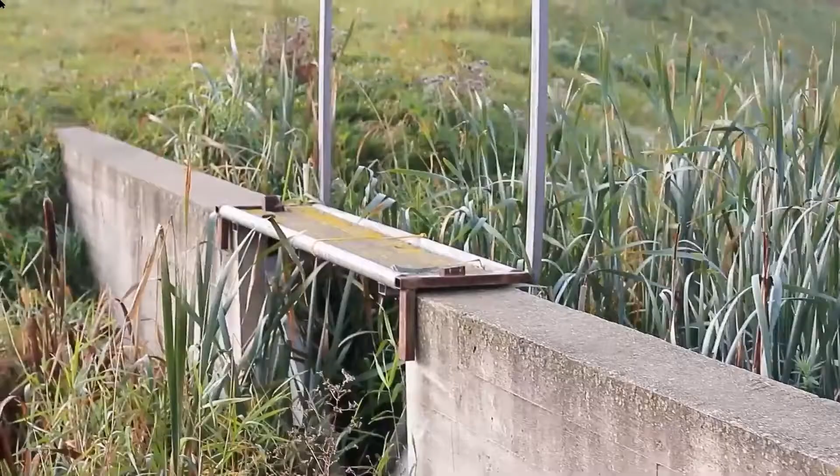Besides this mini diver, we are standing on the dam, which has a Thomson weir underneath, so we can again calculate the water flow. In this monitoring station, we have different equipment for automatic water sampling, for measuring conductivity and water temperature.

And yes, in terms of efficiency, I can say that the treatment process is going well through the years, and we are satisfied with that.

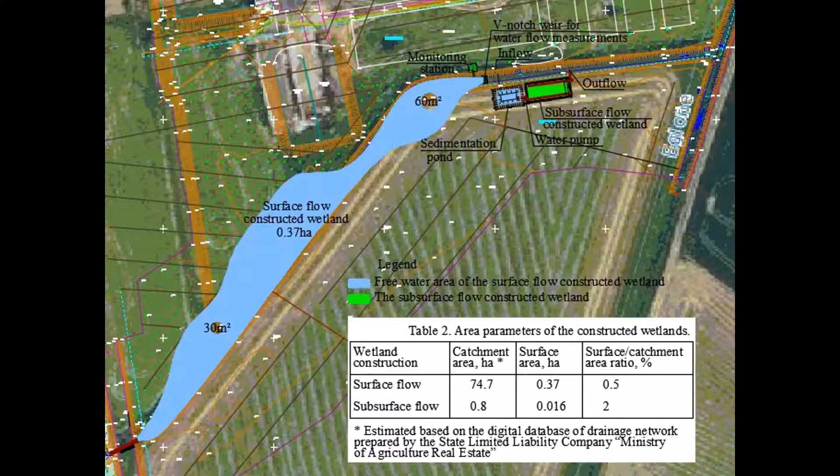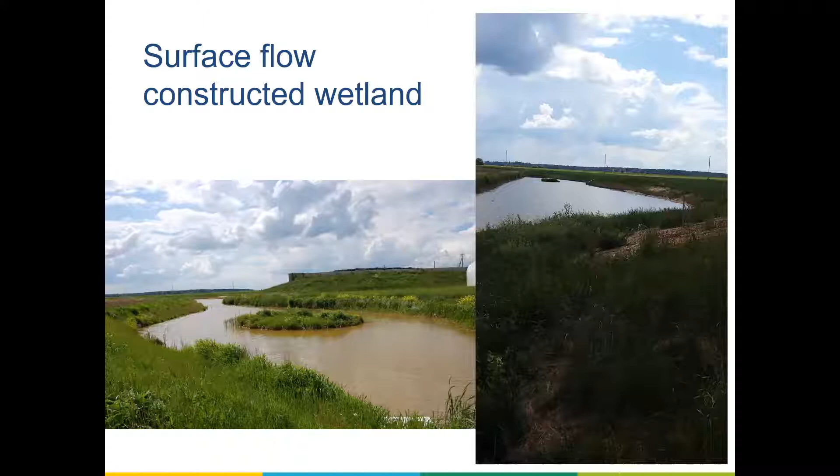So here's the view again for this surface flow constructed wetland, and basically it has worked already for years, and through all those years we have done a monitoring process, and the same with this subsurface flow constructed wetland.

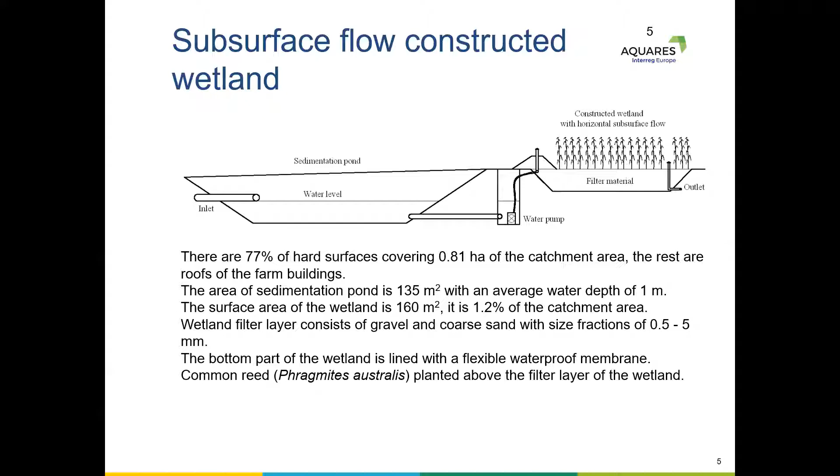Here's just a cross section to show you more detail about what is in the subsurface flow constructed wetland, which is made for surface runoff from the farmyard. Basically, it's rainwater from the hard surfaces. Once again, all the numbers you can find out later or just ask me.

So here it's filled with gravel, planted with common reeds, Phragmites australis, which is a very good growing plant. That's why it was chosen in this case.

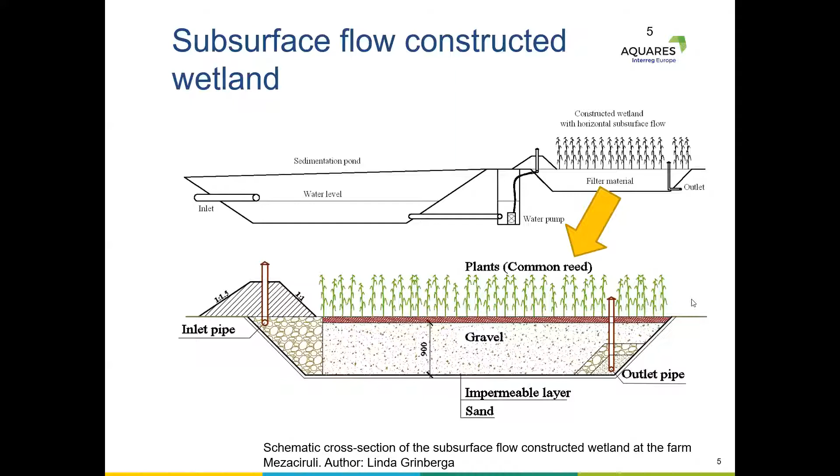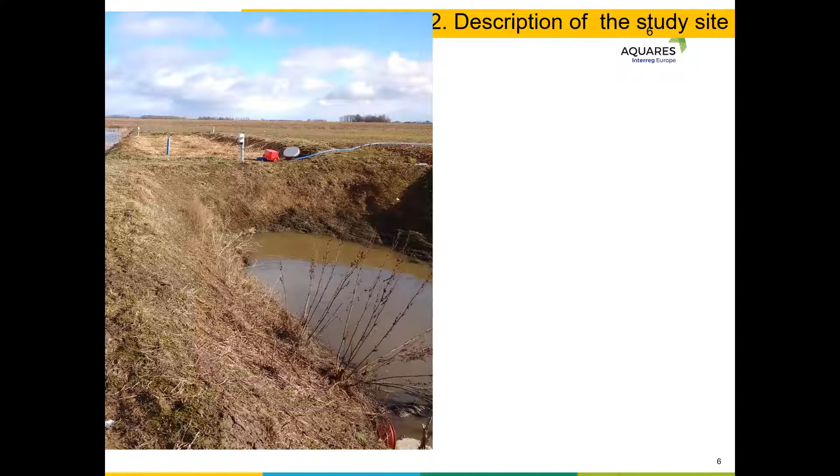Yes, so basically this is already with some plants, beginning of summer, as the seasonal impact in Latvia is very visible. So if you were here this month, you would see a completely different view of this object.

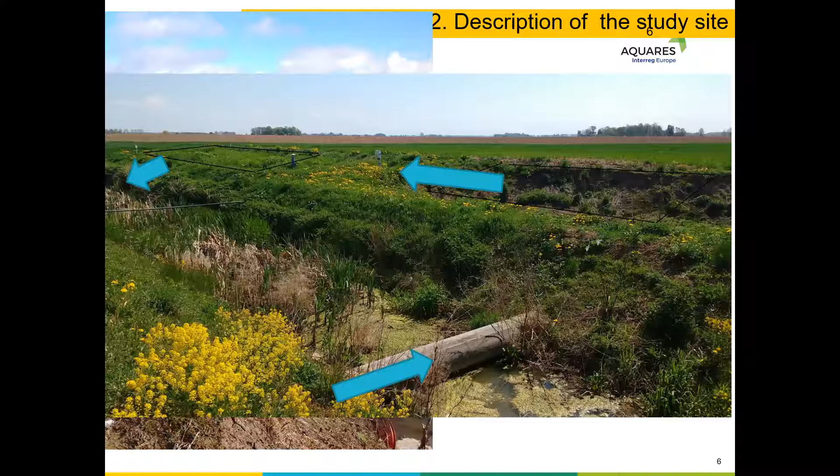So water goes from the farmyard and hard pavements to the sedimentation pond, then through the pipe to the constructed wetland, and then is released back into the open ditch, and with self flow goes to the natural water course.

The methods, basically, we are taking samples for suspended solids, nitrate nitrogen, ammonium nitrogen, total nitrogen, orthophosphate phosphorus, and total phosphorus. We do it once or twice per month, depending on the water flow. If there's no flow, we are not taking the sample. If there is a flow, then we are taking the sample.

And yes, the samples are taken at the beginning of the wetland and at the end of the wetland. What is very interesting for this subsurface flow constructed wetland is the water contains a lot of organics due to all the cattle and the equipment moving around the surfaces. For this year, 2020, we are taking samples not only for those 6 parameters, but we are also analyzing BOD and COD, and the results are so interesting.

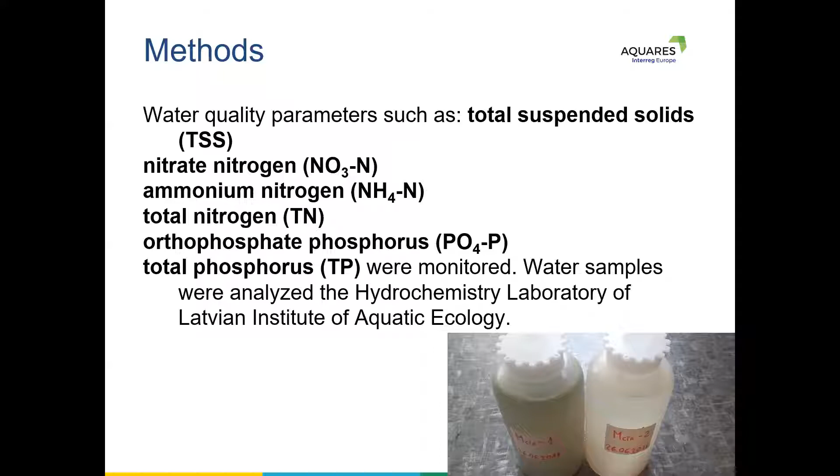I'm very happy for that. I will show you later.

So let's move on. Just a view to understand the situation in Latvia, because it really depends on runoff, precipitation, and whether you have enough water resources, as this project is more about the water resources. In Latvia, basically we don't have a problem with the water amount. There could be a question about water quality, but about the water amount, I wouldn't say that we don't have enough. We have.

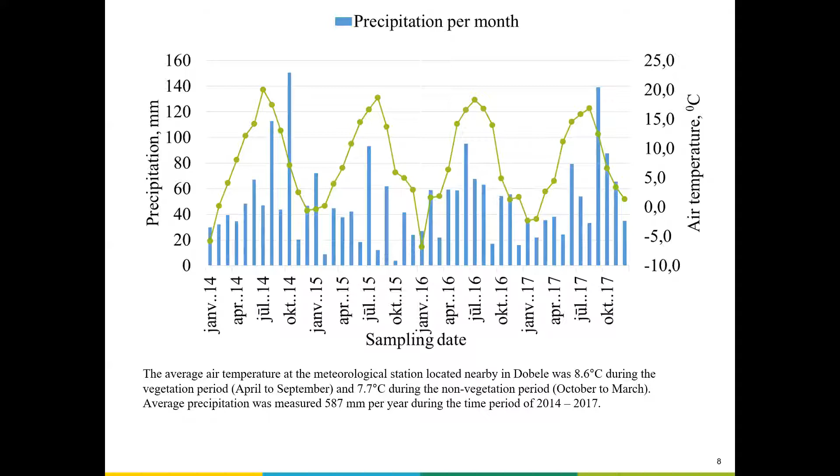So here you can see some data about the precipitation and about air temperature. Some tendencies, seasonality is very good visible. Because of those winters, because of the climate conditions in this area of Latvia, I suggested we use common reeds as vegetation for the constructed wetlands in both cases, because they grow well without any special treatment. They just grow, you just have to cut it regularly.

Yes, and in the surface flow constructed wetland, basically we didn't plant any reeds. In the first year they just spread naturally, and now you saw the video that there is enough vegetation that is serving, basically, for the bacteria. So bacterial activity is the main thing that is treating the water in constructed wetlands.

So the numbers. I would say that as this is a real object, this is not like a lab where you can easily set up the water quality of what comes in. In this case, it's even more interesting because real processes are going on in the farm, excavators are driving, equipment is moving and doing their daily things, and I'm just in the middle of that with my research object, taking samples and then trying to explain why I have this or that result in this or that month.

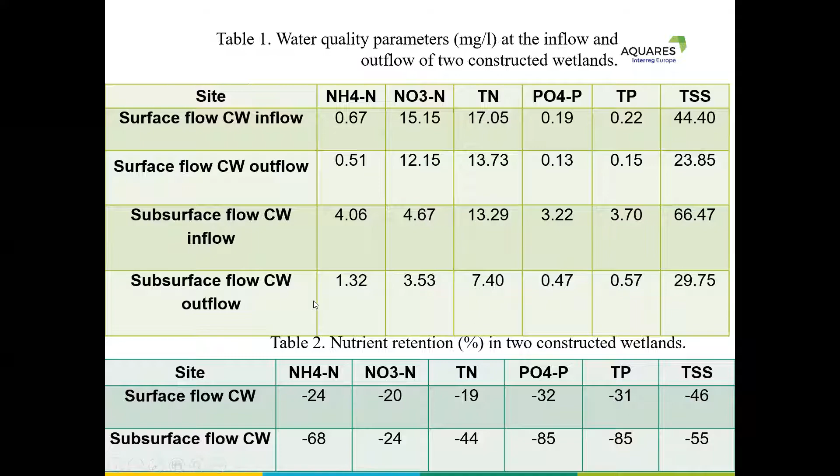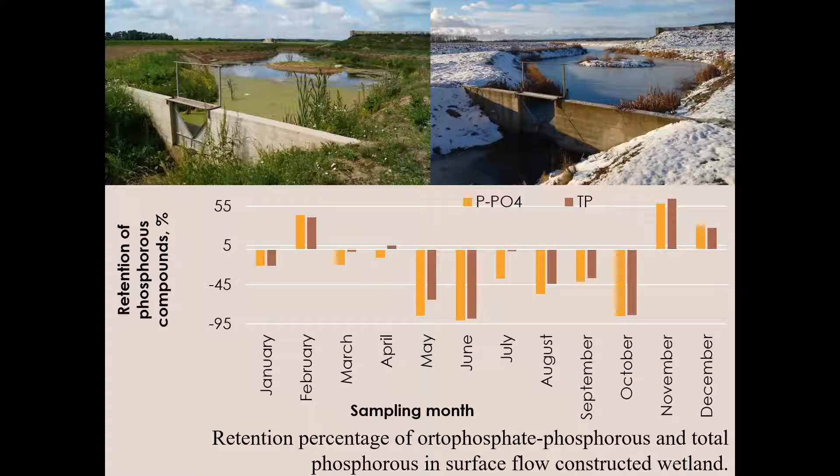The best retention, of course, is during the vegetation period, but this is more due to the water flow and the retention time of the water in the constructed wetland. If you look at treatment in this wetland, in February there is snow melting water and maybe some rain events, and the same in November when it's autumn, there are some rain events which increase the water flow. So the retention time is shorter. Maybe that would be the main issue with the retention efficiency for the constructed wetland.

It's for the phosphorus compounds, and with nitrogen compounds it's more complicated, of course, because bacterial activity is more involved in different transformation processes. Besides that, the surface flow constructed wetland receives not only the drainage water from the catchment basin, but periodically there are some events when surface flow is coming in the middle of the wetland, and that's why those results are very interesting during different seasons, due to activities in the fields.

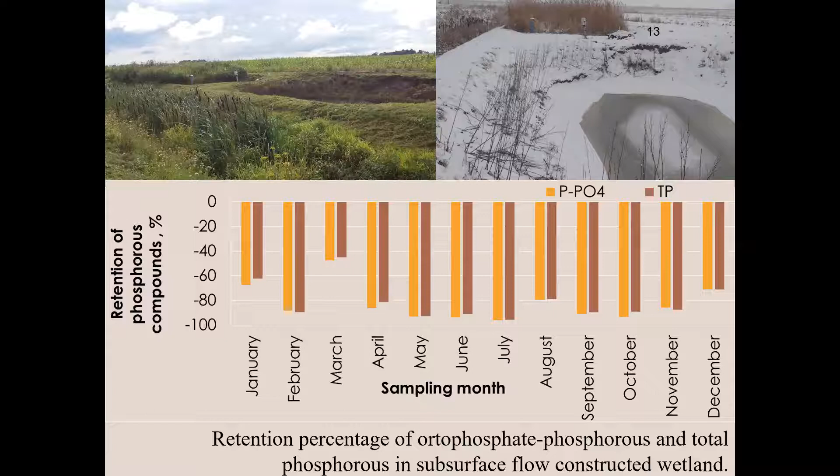So, here is proof that the winter or lower temperatures don't affect the retention efficiency for the constructed wetland. It can easily be used for different kinds of wastewater treatment in these hydrological conditions. The only slightly lower efficiency is during March, which is connected with snow melting waters, meaning more water flow goes through the constructed wetland, and that's why efficiency is a little lower during that month.

Okay, let's skip to the conclusions. I will focus more on what is connected with this particular project and with sustainable water using, because this project was initially made as a treatment system.

But when we built it and started to exploit it and do the monitoring, the owner showed us how this wetland can be used even more, not only for wastewater treatment or water quality improvement. Maybe it wasn't so clear in the video because of the echo sound, but you are able to watch it later once again.

The first thing is that near this wetland are greenhouses, and on this farm, this natural water course, this small stream, during summertime during the vegetation period, the water amount in the river is very low. There are not enough surface water resources to use for any irrigation.

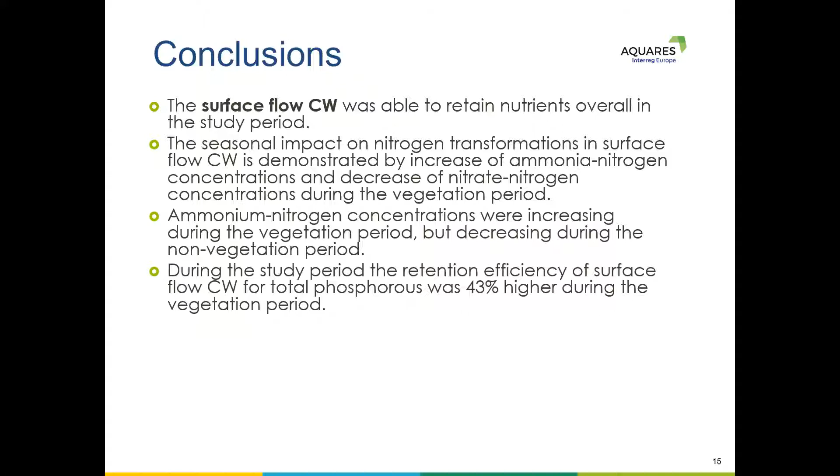So that is the thing. Besides that, of course, he is using this wetland in different other ways for recreation. For example, he's using it as a swimming pond, and he's fishing there. There are fish living there, and of course it's a habitat, increasing biological diversity. I have seen a lot of different animals and birds living in both wetlands while doing my sampling process.

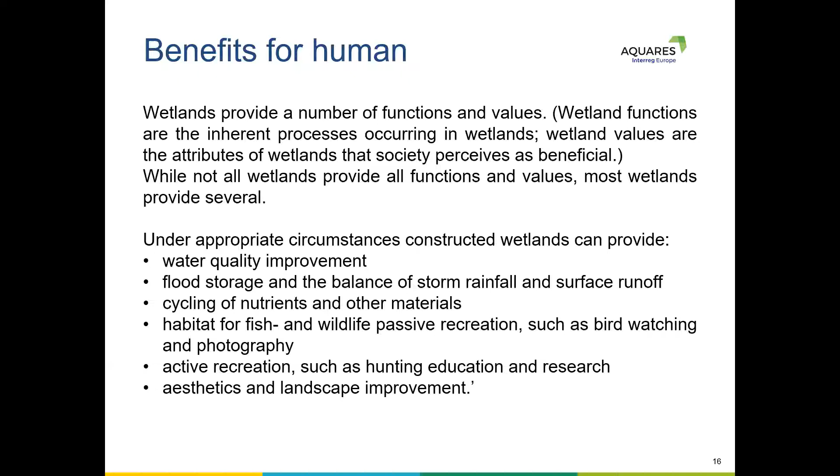So yes, I think that would be it. In very high speed, I believe, my presentation has come to an end. I would be really happy to answer some questions or open discussion if it's allowed.

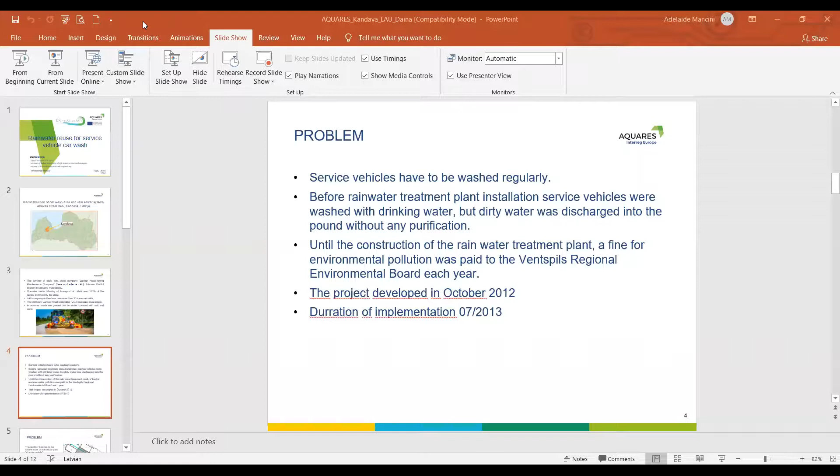I will be doing this presentation. With me is Daina Ievina, who is the detail designer of this good practice and also a lecturer at the Latvian University of Life Sciences and Technologies. She will be with me today. If you have questions, or if I say something less than I should, Daina will correct me and tell me what to add.

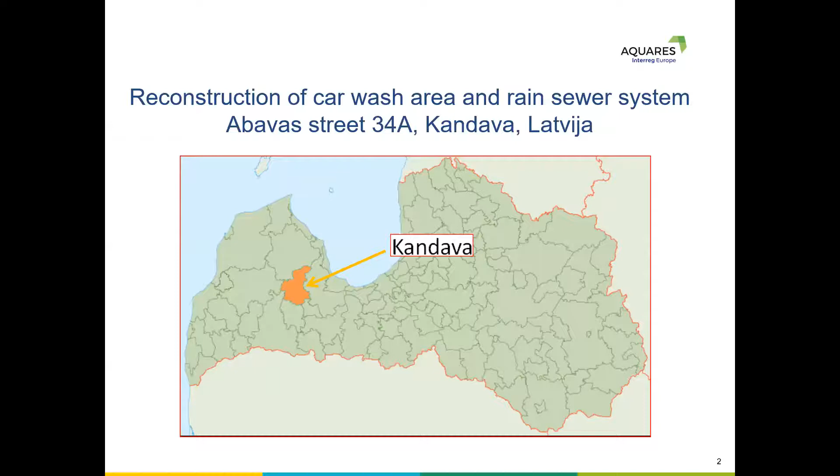Our second good practice is rainwater reuse for service vehicle car wash. As you know from the previous presentation where Latvia is, this is Kandava, the municipality where this good practice is implemented. This practice is implemented in a territory under the Latvian Ministry of Transport, where there is a company called the Latvian Road Laying Maintenance Company.

This company manages state roads, and this company has more different units within Latvia. Now we are speaking about the Kandava municipality where this good practice is implemented.

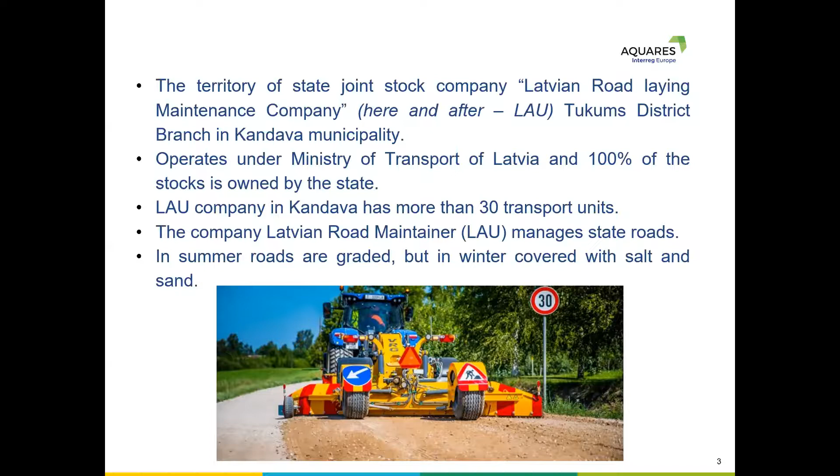The problem, what kind of problem did they have? As you saw in the video, these areas, these territories where they are holding their transport units and washing them, were built in Soviet times. So until the good practice was implemented, nothing was done, and all the things washed off the cars went straight down into nature.

So the problem was that, firstly, you need to wash cars regularly. Every day you need a car wash. If they are going out, then when they are coming back, before storing them in the garage, you need to wash them. So regular washing needed to be done.

At the same time, as there was no purification of the water, the Environmental Board each year gave a fine to this unit, the Kandava transport unit. So they also had to pay penalties. The customer, the Kandava unit, came to detail designers to manage this problem and get the best solution so they could continue to wash cars without polluting the environment.

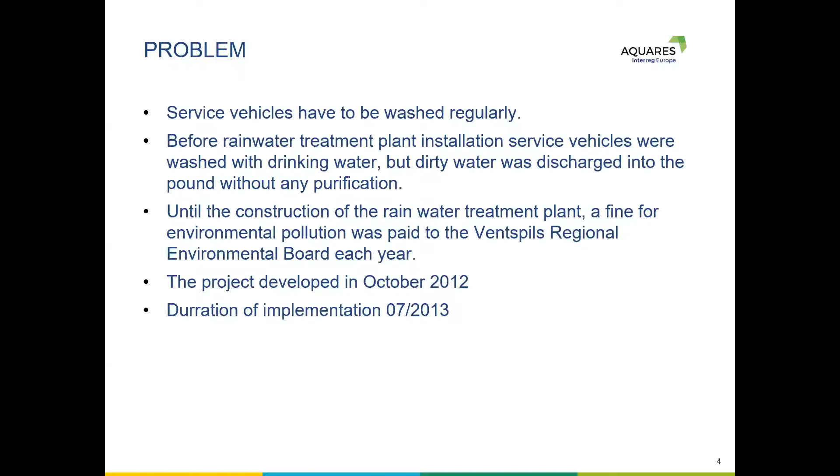A little bit more about the problem and why this was so important regarding the environmental aspect. Because Kandava is in a neutral zone of the nature park Abavas senleja, where the Natural Environmental Board gives stricter specifications. So you need to be very aware of how much purification needs to be done, as they are stricter, as I told you before. They also had pretty high expenses because they had to use drinking water for the washing machines, and the drinking water tariff is almost €2 per cubic meter.

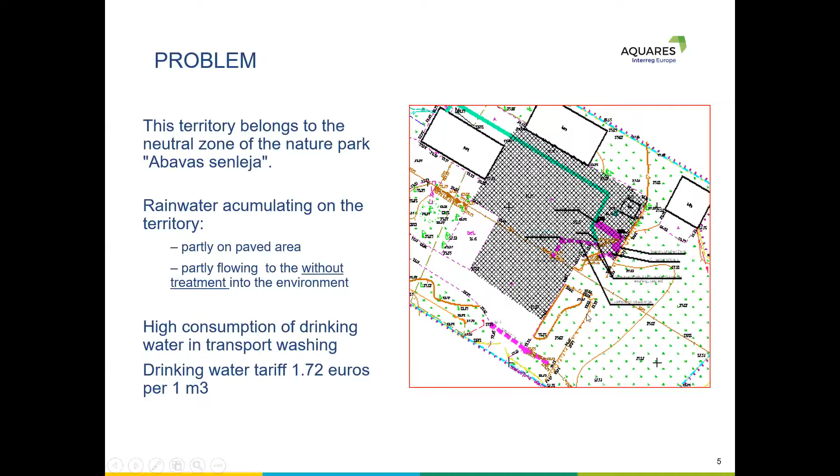As you can see in this picture - I hope everyone sees my bullet, if not please tell me - this gray area is all paved area that collects water into this pink area. Now there's a treatment plant that I will show you later, but before this treatment plant, all of this went straight to nature, without any kind of purification.

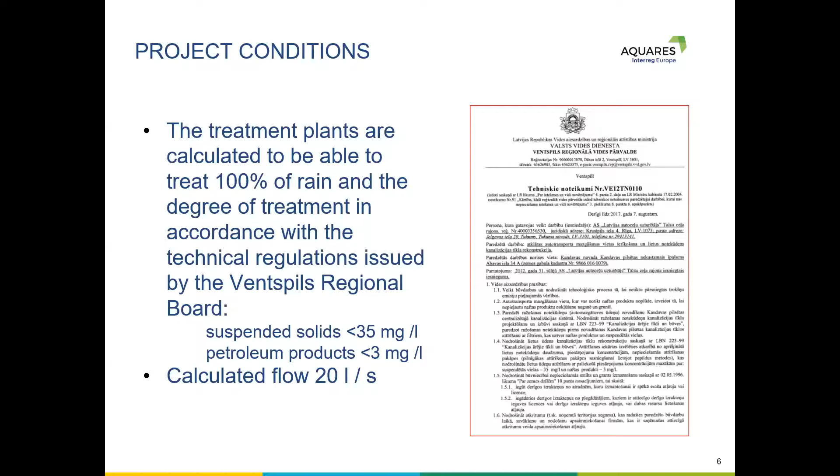So when they were calculating the system and all the technical aspects, they also needed to take into account the technical regulations issued by the Environmental Board. These were stronger than usual: suspended solids had to be lower than 35 milligrams per liter, and oily products had to be less than 3 milligrams per liter. All these calculations were done for a rainwater flow of 20 liters per second. After the calculations, they understood that all the rainwater collected in this paved area could be used in full amount for the car wash service.

So the treatment plants - the treatment plant consists of two parts. The first one is the sand catcher, here you can see the sand catcher. And the second one is the oil separation tanks.

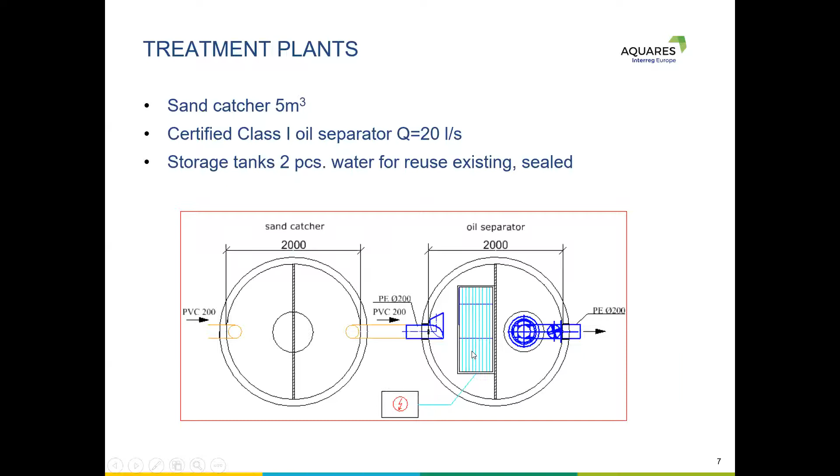This is the picture from above. You can see here, under the transport, is the trap where all the water, all the washed water, is infiltrated. Then after this it goes to the sand catcher, this one. Then from the sand catcher it goes to oil separation, these two. And then the clean water goes to two 5 cubic meter tanks - this one here, and the other one is under the house.

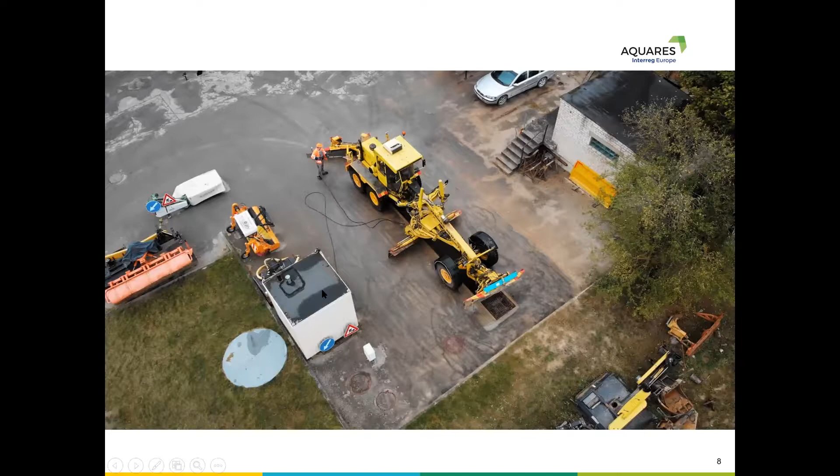So the treatment plant itself: here we can see the water flows into the sedimentation, or sand catcher. Then when all the sedimentation has settled, the clean water flows to the second treatment, the oil separation.

This oil separation is also in two parts. The first part is the BioBlock. For the BioBlock to work, there should be an air compressor. This is the part where the biggest oil parts are separated.

When the biggest oil parts are separated, it flows to the second oil treatment, which is the coalescence filter with sorbent. This collects smaller parts of the oils, and then clean water flows into the storage tanks. This is how this closed cycle of rainwater is treated and reused as many times as needed.

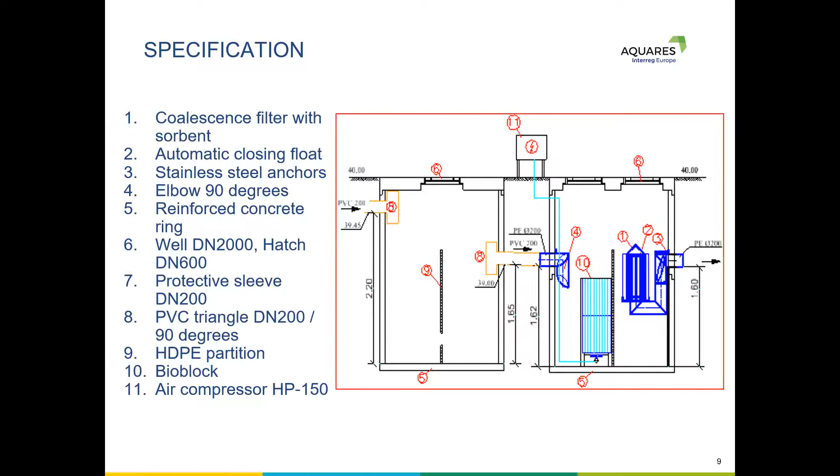So for one unit to be washed, it should be from 500 to 800 liters. So in a day, the approximate number is 5 to 8 transport units per day.

Construction of the system was done in 2012, and it cost more than 4,500 euros. When all these calculations were done before they implemented this good practice, they had to do calculations.

For financial savings over the next 5 years, they estimated the savings would be more than 2,000 euros, but the actual savings for the customer within 5 years had been more than 4,000 euros so far.

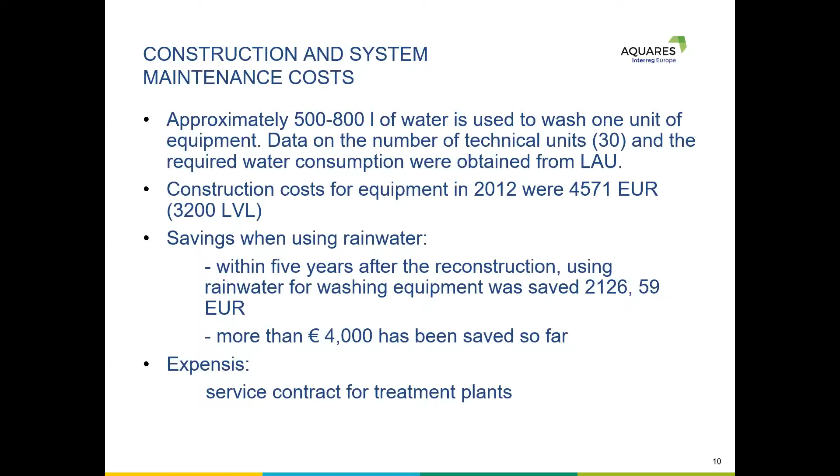They are also cleaning the system, since the system needs to be cleaned once a year. Unfortunately, the customer is not so keen on sharing the numbers for how much the cleaning costs, but they have a contracted service contractor who treats these treatment plants.

That's basically a very simple system that could be used. The main benefit is financial saving, because drinking water is only used if there are really long periods of drought, and for rainwater you don't have to pay anything. So there's huge financial savings.

The other benefit is a clean environment, because you don't pay a fine to our environmental board, and there is no pollution to the environment. Also, awareness raising is important, because all the employees see how to use sustainable water resources and sustainably use rainwater, and also the replicability of this good practice.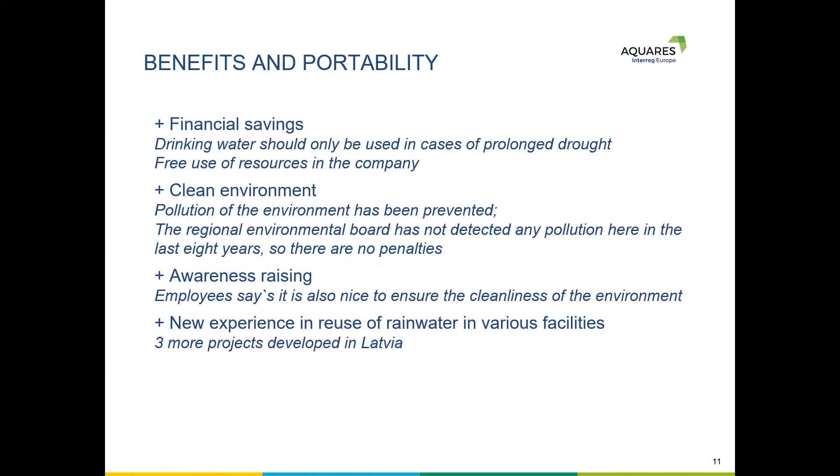This good practice is now already in 3 projects in Latvia. One is already built, another is in the build procurement procedure stage, and the third is in the detailed design stage. So other units are also interested in this rainwater reuse good experience and implementation. Thank you very much, questions are welcome.

Everything was very clear in the presentation, and it's very easy to replicate these good practices in other places, because the whole procedure to implement this good practice is perfectly explained in the presentation. I think that's why there are no more questions.